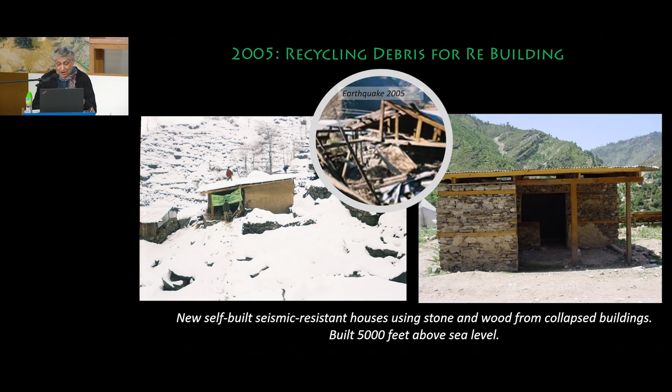Until then, I had believed my training was solely meant to serve the elite, not to address the needs of communities in distress. With the experience that I had, I came to realize the transformative power of design in helping disadvantaged communities to be able to lead better, more secure lives. Somehow we overlook that, the power of design that is there. So now let's see now.

So as a practicing architect, aside from a few redeeming projects of social housing, I'd pursued an extravagant, self-indulgent journey serving the elite of my country. For three decades, I sequestered myself within a world of privileges, only to realize that I was in fact contributing to growth of further inequalities in society.

I felt, should I not be guided by humanistic codes and egalitarian ideals, just as doctors take the Hippocratic Oath to serve humanity? Surely the ethics of architecture must also compel us to strive for a just society. Why must we continue to seek patronage that has sustained architects for centuries, from wealthy entities such as the Medicis of Florence to today's capitalism-driven tech billionaires?

I decided to abandon my elitist architectural practice and reset my priorities in order to help the vast majority that were affected by climate disasters, food insecurity, and ecological tyranny. I realized that it is not only the privileged who have a right to enjoy well-designed environments, but those that live on the margins, that need more, not less design, to achieve a better quality of life. This change in direction marked the beginning of my journey as a socio-ecological activist.

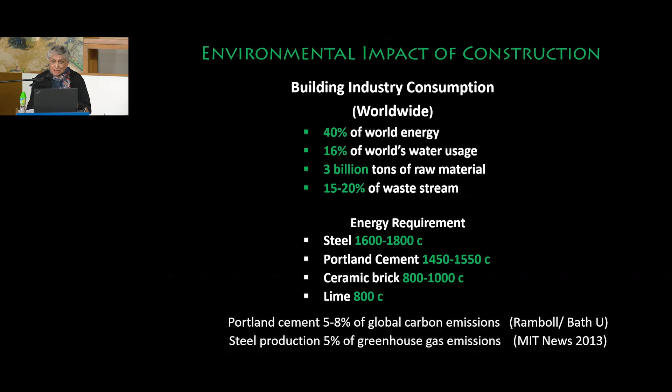So, knowing the harm caused by using conventional building methods, I decided forever to forego reliance on major polluters such as high carbon cement and steel. I haven't touched them since the year 2000, and other carbon-intensive industrialized materials.

So myself, as a citizen of the global south, having seen abject poverty and belonging to a frontline vulnerable state that suffers from recurring disasters, for me, the basis of all development must be good design that incorporates climate resilience for the poorest. And just to say a little bit about the reservoir of diverse cultural heritage of Pakistan.

The collection of tangible heritage ranges from Bronze Age World Heritage Mohenjo-Daro, Greco-Buddhist, Jain, Hindu, and Sikh remains, 15th century Sultanate period sites such as Makli World Heritage, Mughal Shalimar Paradisal Gardens, forts and palaces, and a shared heritage of the British colonial period of 19th and 20th centuries.

The intangible heritage has shaped the lives of our people that is all-pervading and includes Sufi traditions and spiritualism, folklore, ecstatic dance and music, oral history, and particularly diverse crafts, many still being practiced by rural women that have been passed on to them from generation to generation, from mother to daughter.

And then the vernacular heritage, from where I've learned the use of sustainable materials, local sourcing, ease of handling, economy in use, all based on age-old local wisdoms.

So the traditional architecture in Pakistan is a depository of procedures to regulate indoor microclimate without mechanical means. These help us to devise innovative ways to deal with today's climate upheaval. This is a wonderfully decorated 19th century mansion in Peshawar's walled city. The courtyard configuration creates its own microclimate. Cold or warm air, depending upon the weather, is stored in the atrium that keeps the surrounding rooms cool or warm during the day.

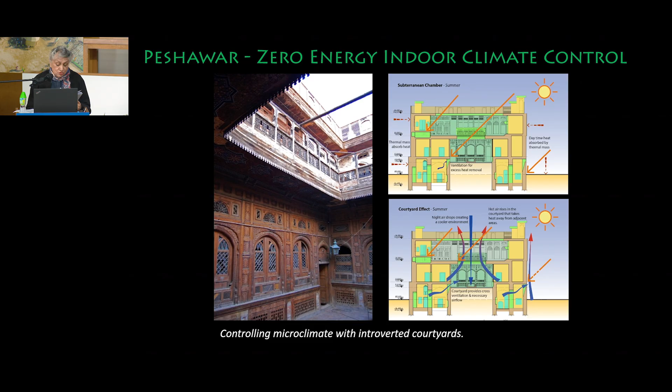And then this book is about the historic town of Thatta with its distinctive wind scoops and beautiful lime-stabilized mud-plastered walls. The sketch shows how prevailing wind is drawn inside the house, providing natural ventilation, again, without any mechanical means at all.

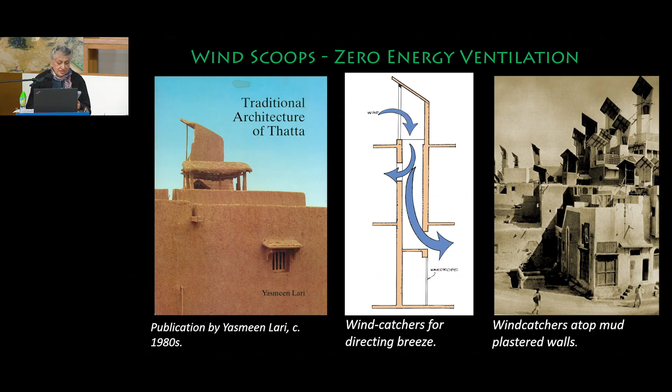So as I said, although we have rich heritage, but our people grapple with severe poverty, inequality, and deprivation. As I began working with marginalized communities, I felt a deep empathy for those who walked barefoot and had become my fellow travelers. I realized that walking without shoes has its own rewards.

It fosters a connection with the earth and a reminder of traditions that are rooted in judicious utilization of the planet's resources. Has anybody ever walked on dew in the morning, on grass at all? Maybe sometimes it's a good idea to do that.

It was the interaction with impoverished and vulnerable populations that compelled me to dispense with my hugely inflated ego, obligating me to swallow the bitter pill of humility by sitting at the threshold of the poor, exploring their age-old practices. Learning from Pakistan's pre-industrial vernacular heritage, I understood that design is not a stand-alone activity. It must be underpinned by considerations of social impact and ecological sustainability.

This bottoms-up approach has enabled me to mitigate injustices through a nexus of architectural design, tradition, and local knowledge. As Architect for the Poor, a deeply cherished title that I received from Politecnico di Milano, at the time of the award of an honorary degree, I'm compelled to help implement Edward Soja's vision of spatial justice. As an activist, my mission extends to bringing about tangible, impactful design or change by promotion of social and ecological justice and empowerment of the voiceless through architecture.

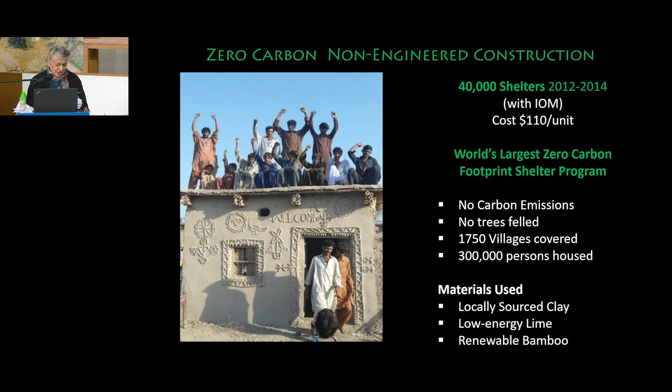The concerns are laid to rest by getting 10 to 12 family members to climb on the roof, because nobody believed it was strong enough. So we just did that.

Just a slide to show how it's co-built and personalized by housewives. They're the ones who personalize these structures themselves.

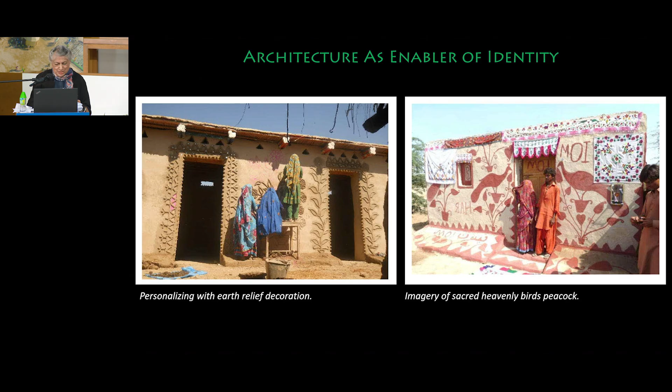And then, of course, the Pakistan Chula that you have so kindly introduced already—these actually got a World Habitat Gold Award. This stove has been life-transforming, giving dignity and agency to oppressed women.

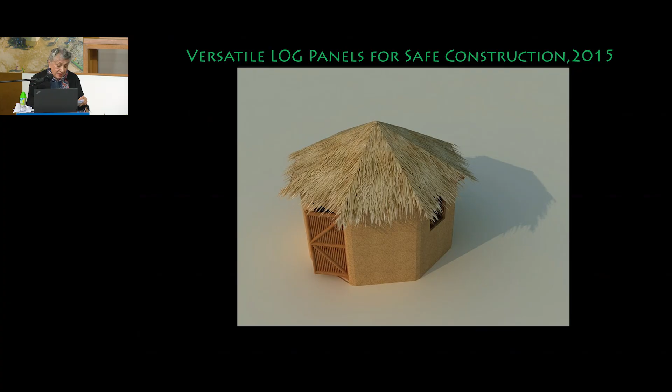This shows the versatility of the simple bamboo structure for multiple uses.

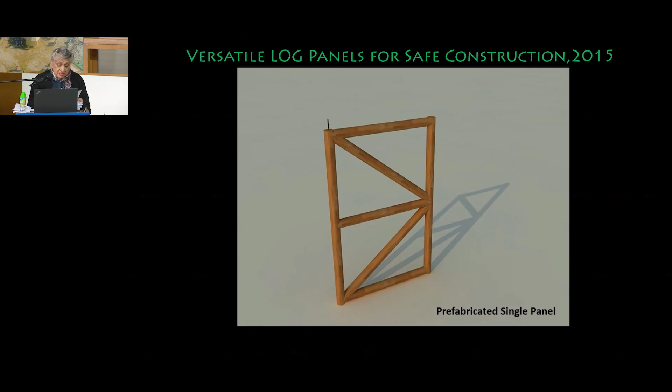I managed to fine-tune the traditional cross-braced Dhajji, or sturdy construction technique, with the introduction of the modern concept of prefabrication. The strength of the structure has since been tested in many thousands of villages and buildings.

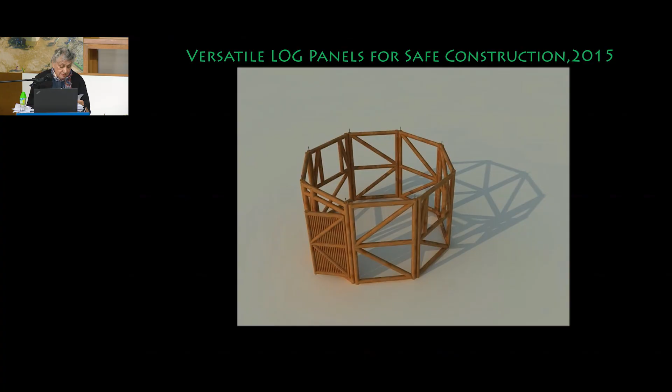The use of prefab panels and modular form provides multiple possibilities. There are some variations to show how versatile such structures are. The prefabrication technique and modular forms have facilitated varied configurations and change of roof form from conical to sloping and also domical.

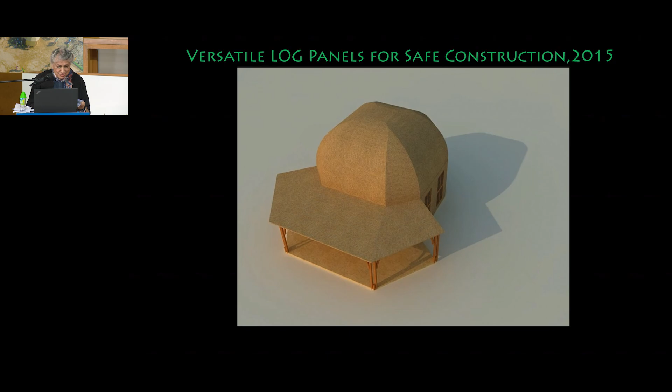And then, of course, you already have the slide that I have to show you—the one that keeps on appearing here—one that was built in Bangladesh, then in the Royal Estate of Highgrove, and then also in Doha, decorated by my female artisans.

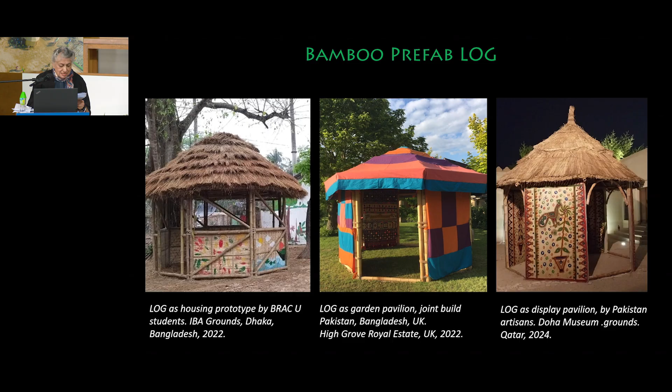This was done by Al Jazeera. It says 'Women Center on Stilts.' And you can see that—sorry, where do I go back? Yeah, it's okay.

It just shows how you can deal with the rising waters, with flooding and everything, because if you have the upper floor, you are secure in that. And so there we are.

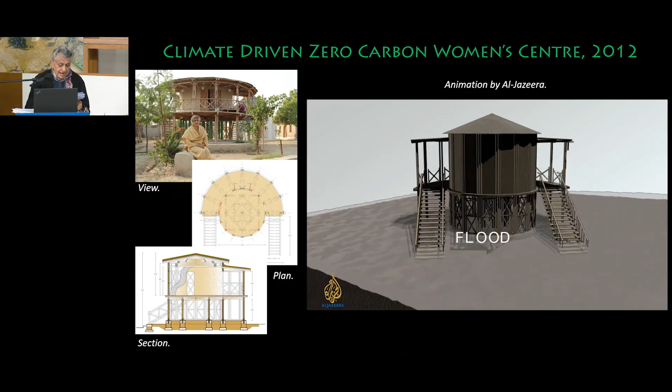It was built by non-literate, semi-skilled artisans. Its openness provides air movement and a cool interior without any mechanical arrangement.

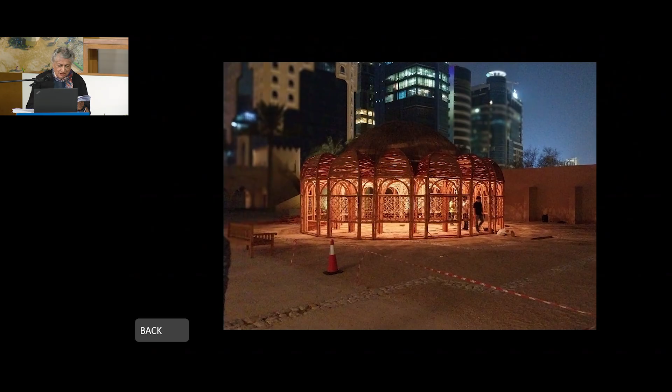This is a large community center, shown here as well. It was in Doha, and then it was dismantled and taken to the Venice Biennale, where it stood for several months, as you know, in the exhibition there.

This is the good thing about prefabrication—you can pack it, you can take it anywhere that you like. And the fact is that it's all built by really non-literate people.

I call them transition structures because they're not really permanent. They are mostly without any foundations, but they are designed to be quite strong and can withstand any kind of shocks. But normally for flooding, we actually have foundations.

This is being taken back to Doha, and it'll be a neighbor to the spectacular Museum, which is a little bit ironic, but there it is.

This segment is about my presentation on the devastating floods in Pakistan.

The deluge wreaked havoc across the entire country. A third of Pakistan was submerged, 33 million people were displaced. The majority had become destitute without shelter or adequate food. In the province alone where I live, 3 million households were in a critical state and needed immediate action.

We felt that this was the time to demonstrate the effectiveness of humanistic humanitarianism and the efficacy of participatory coping methodologies. This community-based disaster preparedness emerged as the cornerstone to achieve Sustainable Development Goal number 1, which is no poverty. Clearly, if 3 million households needed help to meet the target of sustainable rehabilitation, we would have to aim for

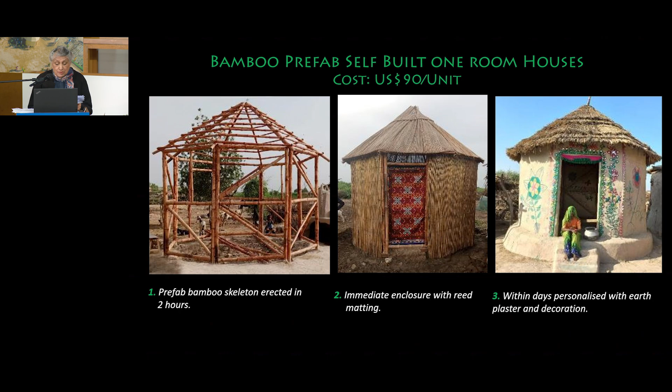It is wrapped with matting and then finished with lime mud plaster, mostly by housewives. The roof is covered with thatch panels. Although each bamboo prefab structure is the same, each one becomes unique since housewives personalize it with their own creative designs. This is how they participate in the whole thing.

So just to say what step one on the poverty escape ladder is: it focuses on meeting rights-based needs of shelter—a one-room house, shared toilets, water supply, solar energy, and a smokeless earthen stove. These essentials create dignified living conditions and privacy, particularly for women.

Then in the slide, this is step number 2. It addresses food sufficiency by teaching families to grow vegetables and cereals, breeding fish in domestic tanks and poultry to fulfill their dietary needs. Surplus vegetables are bartered for dairy products, creating a balanced food supply.

These are steps number 3 and 4, providing environmental stewardship as well as flood mitigation. This means planting community forests with indigenous trees, enhancing biodiversity. Flood mitigation measures work in tandem with environmental stewardship, such as conserving floodwater in ponds, replenishing depleted aquifers through trenches or recharge wells, enhancing soil fertility while securing villages against future floods. So all of it has to be done.

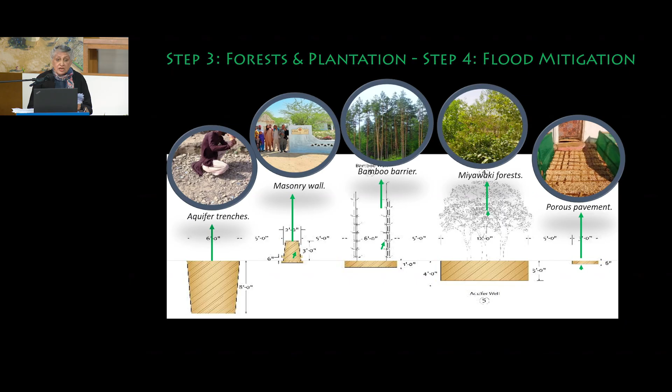Then step 5, a training of barefoot skills. They begin generating income from eco projects, ranging from basketry from banana waste, reed matting, bamboo products, and handmade pottery and craft based on waste fabric.

So crafts again play a very important role here. They are enabled to begin production and marketing of their barefoot products to fulfill the basic needs of impoverished people in the area. This assisted holistic model has enabled 10,000 families, or almost 100,000 people, to break free from the cycle of poverty within a year.

But I found little support for my sustainable model of rehabilitation by the government. They wanted to do high carbon stuff, so they didn't really want to support that.

So in April 2023, I launched the program 1 Million Families at a Time. You can see how you can actually bring about transformation. So we devised a new framework for communities to escape poverty: humanistic humanitarianism, zero donor dependence, 4 zeros - zero carbon, zero waste, zero charity for zero poverty, and potential in poverty, peer-to-peer knowledge sharing.

So I devised another poverty escape ladder. But there are 9 steps rather than earlier 6. And 4 years are needed instead of 1 year to overcome poverty.

We have achieved considerable progress for 1 million families, or 7 to 8 million people. Within 30 months, step 1 to 4 were achieved. 1 million families became food sufficient and became flood secure. 1 million trees were planted, more than that, I think 3 to 4 million trees were planted, 100 hectares of land brought under plantation. Within 36 months, they were on their way to reach step 5 to 8.

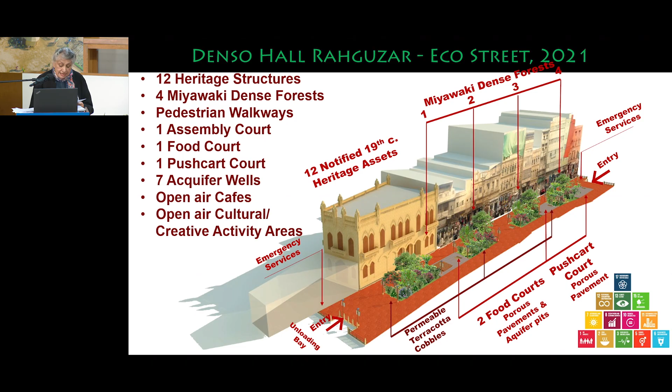And I'm learning a lot from the sponge city concept that is now popular in China, where so many cities have taken it up. And then also making vehicle-free streets, allowing cultural and other community activities to flourish. So after 3 years, our trees grew to more than 6 meters, showing a difference of 12 degrees in temperature between outside and inside the street. The street also remained flood-free during excessive urban flooding in 2022.

So now, none of these concepts are new actually, but the combination of recharge wells, permeable terracotta pavers, terracotta sponge pavements, and mini street forests has created a new paradigm in eco-urbanism.

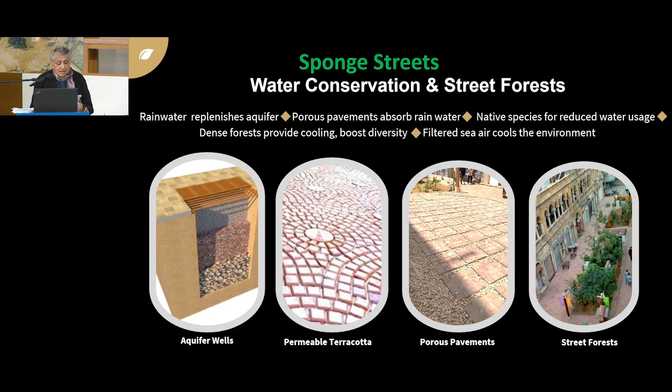So I'll just run through these slides. It basically shows what it was and what it became. I won't talk about them because I think you have enough written on them, but let's just see. So again, this is when we got this flooding. This is what it looks like. And then this is how it can be, or did become.

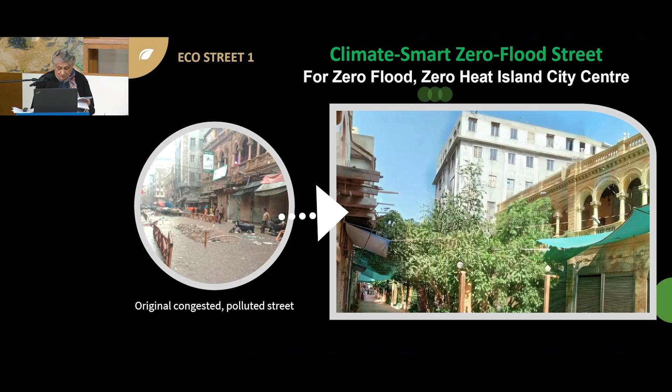Let's go next. Again, this is a beautiful 19th century historic building that was in this particular state. And then this is what it became finally. So much is possible in all our cities, at least in my own country that I'm familiar with. But I'm sure that elsewhere as well, a lot is possible.

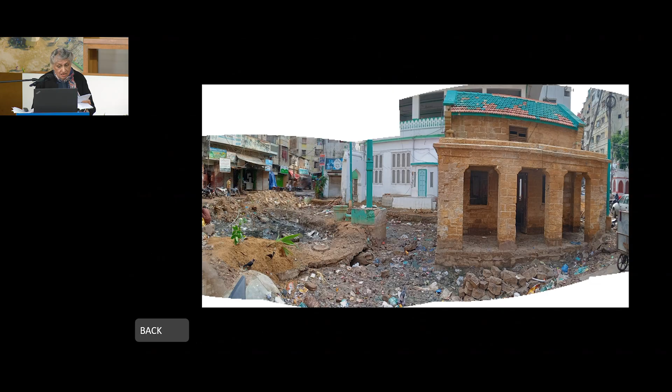Then this is the second one that again is a highly degraded environment, right in the middle of the city with huge congestion. And its focus is this particular 150-year-old police post built by the British, but in a terrible state. So the community was responsible for planting. Let me see now if I can go back. Yeah, you can see we started restoring it, but you can see the mess all around it. And then this is what it finally looked like.

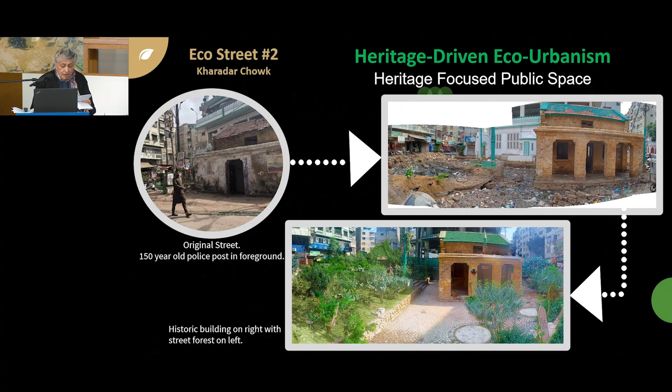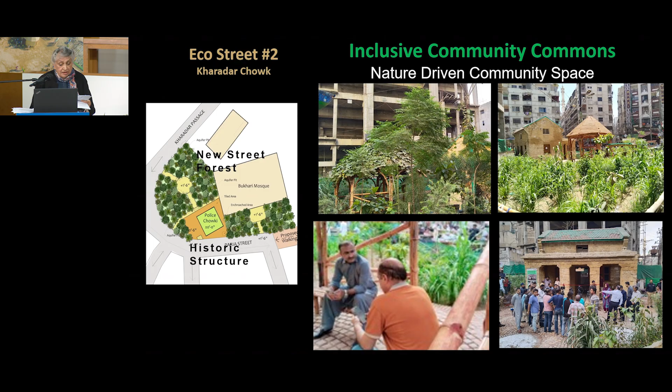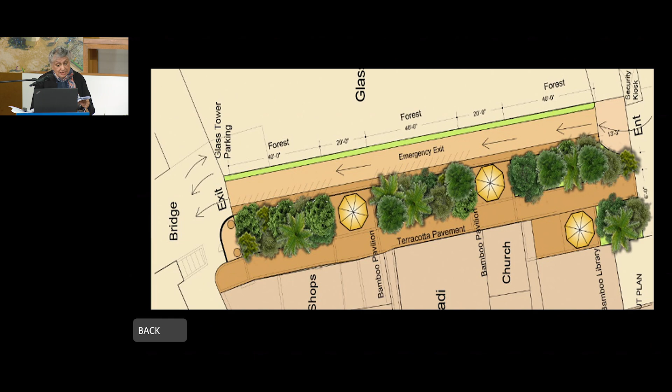And this is how it's now been taken over by the community itself, and they are really taking care of it and cleaning it. So this is the plan: this is the slum on this side here, and this is how we've got the trees, but we've also got these gazebos, and this one is really a small street library, which is now being used. So there's so much potential in this kind of thing. And then this is what it is.

And this has now become a children's art studio for the slum children, who never had a chance before. So by repurposing urban streets as community commons, we are promoting a culture of inclusivity. The Eco Street fosters spatial, social, and ecological justice, enabling extended public space for use by those living on the margins, in congested areas and slums. It can be taken up anywhere, really. So it's clear that community-driven, innovative, local actions can lead to healthy environments for the well-being of residents, even in the most congested and dense cities.

In most countries, the field of eco-urbanism and conversion into eco-streets and so many other aspects is wide open. There are very few architects working on that. And knowing that the future belongs to technology and the proliferation of AI tools, which will in the near future render conventional architectural and design practices redundant. I don't know whether many are aware of that.